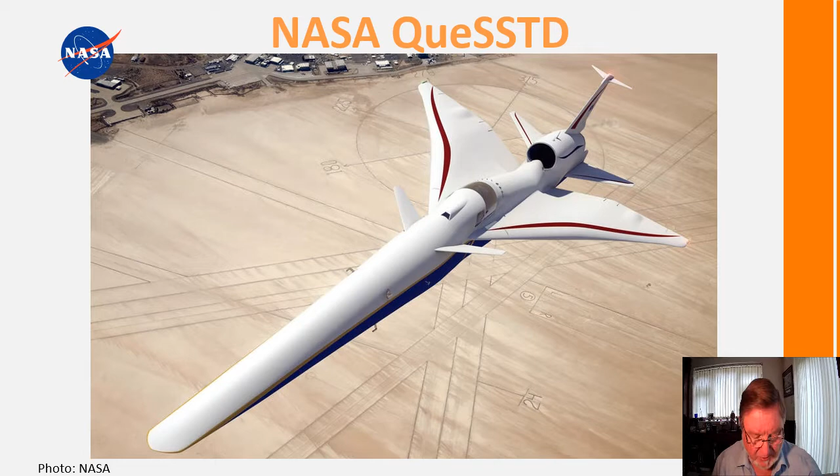There are a number of supersonic jet programs in progress. Once the flag is lifted to allow supersonic flight over land, especially in North America, the race will be on.

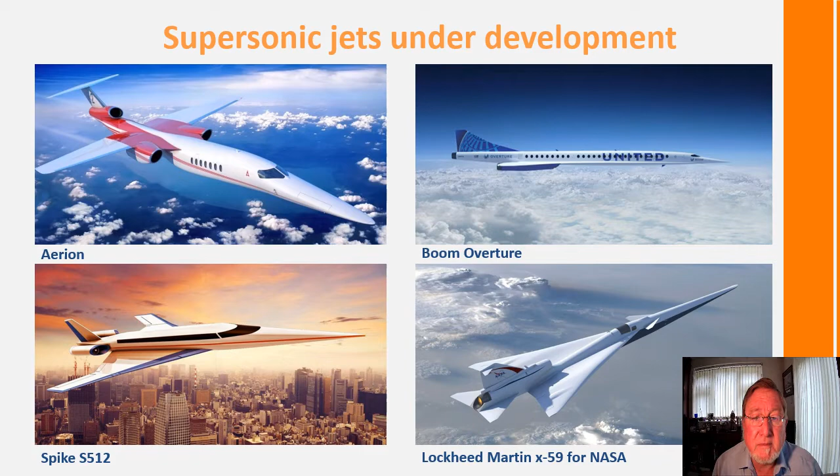Conditioning the air intake for supersonic jets is an important element of the engine design. Intake designs have changed relatively little since the original Concorde Olympus engines from Rolls-Royce 40 years ago.

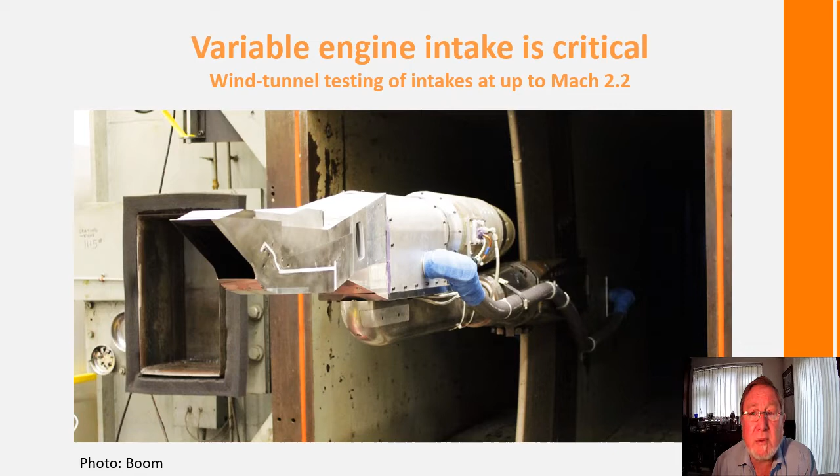Speaking of the engine challenge, Korovkin and his colleagues from CIAM in Russia showed us an alternative derivative engine with variable geometry. This engine study has a CFM56 engine at its core.

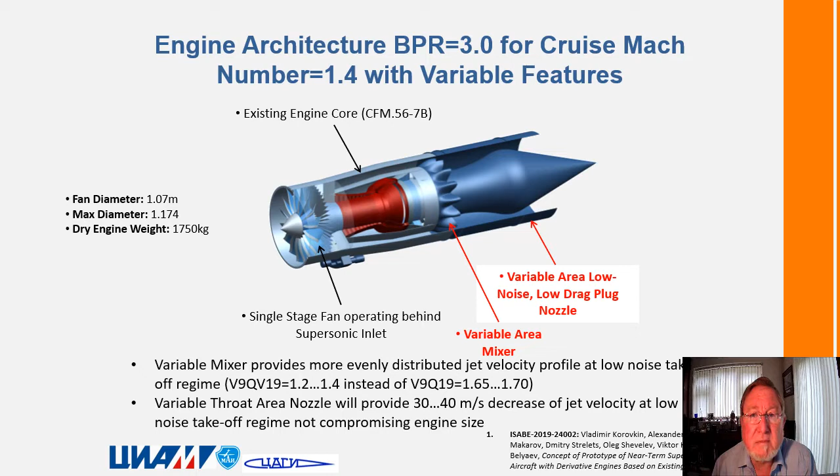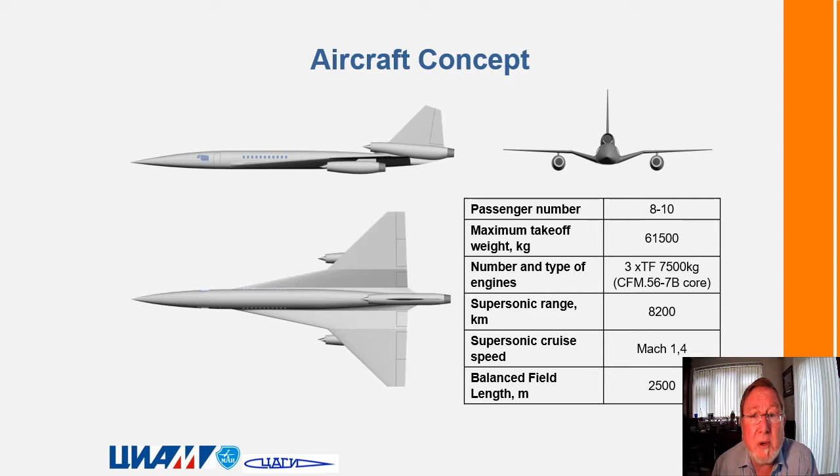They also showed a supersonic business aircraft concept, powered by their supersonic derivative engine. The very long nacelle helps absorb engine noise, while the variable mixer reduces takeoff noise. It lacks the very long profile shape of the NASA concept, so it's unlikely to achieve the sub 0.5 PSF boom at ground level that is required.

America's latest supersonic military jet is the F-35 Lightning. It is powered by a Pratt & Whitney F135 engine, a derivative of the F119. This was described by Thomas Prete of Pratt & Whitney. The alternative F136 engine from GE and Rolls-Royce was unfortunately shelved.

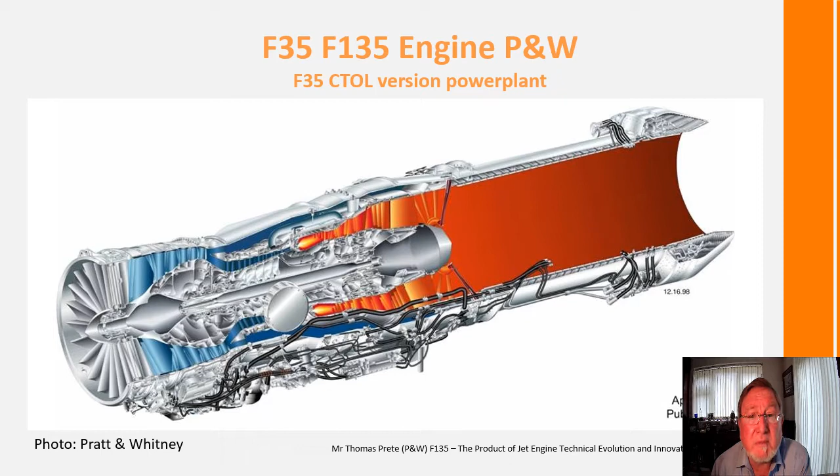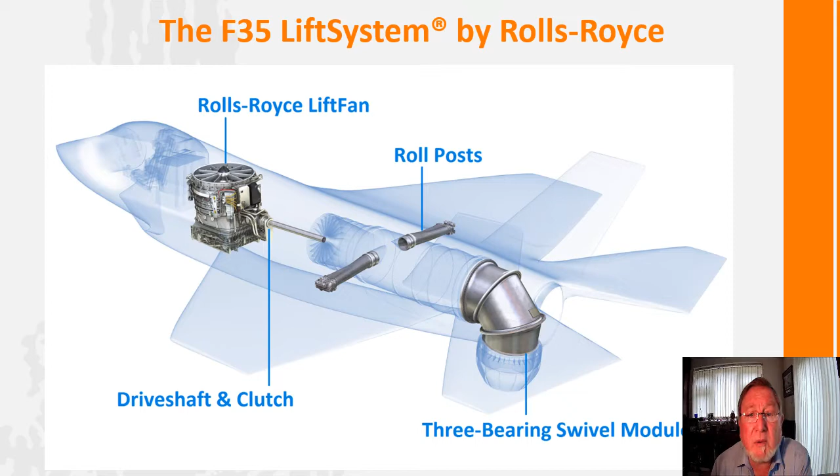Rolls-Royce does, however, produce the vertical lift system for the F-35B, the vertical takeoff version of the F-35 Lightning. This consists of a shaft-driven lift fan, dual fan, counter-rotating, driven by a shaft off the main engine through a carbon clutch and gearbox. At the back end is a 3-bearing swivel nozzle, which can transition from horizontal to vertical flight in just 3 seconds.

At speeds significantly beyond Mach 5, we're into the hypersonic regime, which brings its own propulsion challenges. Kevin Bowcutt of Boeing gave an excellent introduction to hypersonic flight, based on his long experience in the field. Here are some of his rules of thumb: conventional turbines will get you to around Mach 4.5, but have the advantage that they work from zero forward velocity, unlike ramjets and scramjets.

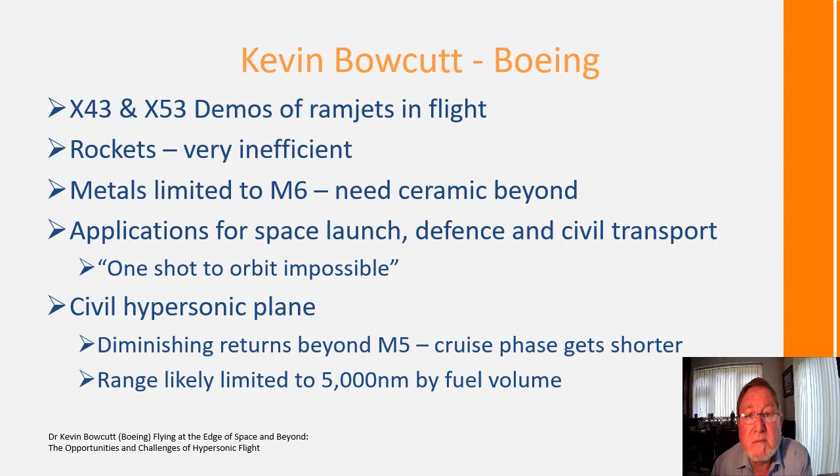Australia is a major centre for hypersonic propulsion research, and 5 universities all work together in developing these technologies. NASA has signed a new collaboration agreement to use the research institutes and the Woomera testing range to further develop hypersonic propulsion in partnership.

The Boeing X-51 Waverider is an unmanned research scramjet for hypersonic flight at Mach 5 and an altitude of 70,000 feet, that's 21,000 meters. It completed its first powered hypersonic flight on the 26th of May 2010. On the 1st of May 2013, it completed a flight of over 6 minutes and reached speeds of Mach 5 for 210 seconds. This is the fastest and longest duration powered hypersonic flight of this type.

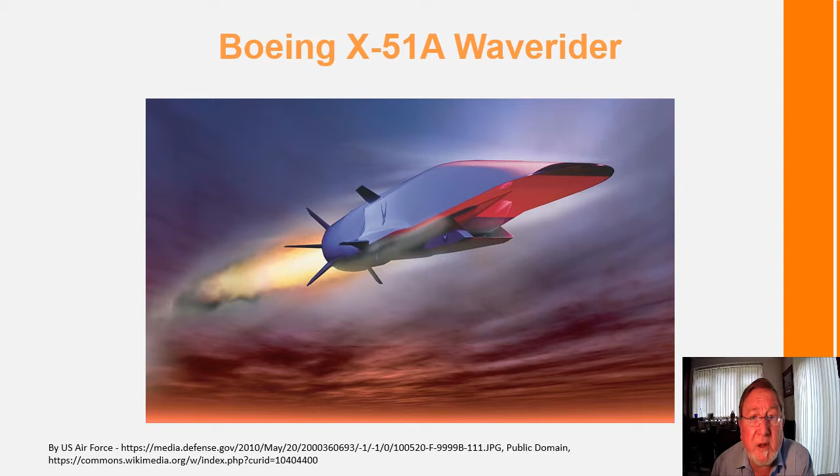Similar to its Boeing counterpart, the Chinese are already driving forward in hypersonic propulsion systems with their 0901.

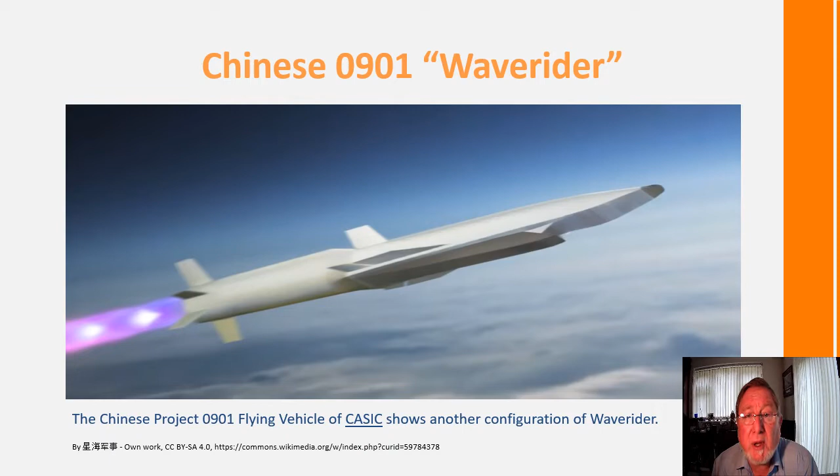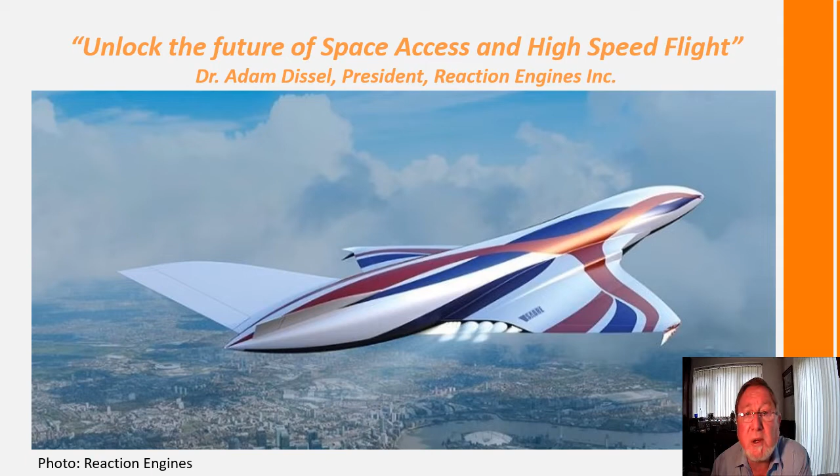We also heard from Adam Dissel, president of Reaction Engines Inc. The company Reaction Engines was the brainchild of Alan Bond. I worked with Alan on the original UK HOTOL spaceplane engines in 1985. HOTOL used liquid hydrogen fuel to cool the incoming air. Several miles of fine titanium tubes filled with liquid hydrogen was not such a great idea.

The latest SABRE concept from Reaction Engines introduces a liquid helium cycle as the inlet cooling medium. The helium boil-off in turn preheats the liquid hydrogen and drives the hydrogen fuel pump. The inlet air cooler has been demonstrated under a DARPA grant in the USA, running in the exhaust stream of a GE military engine, where it demonstrated the ability to drop the inlet air temperature by 250 degrees C.

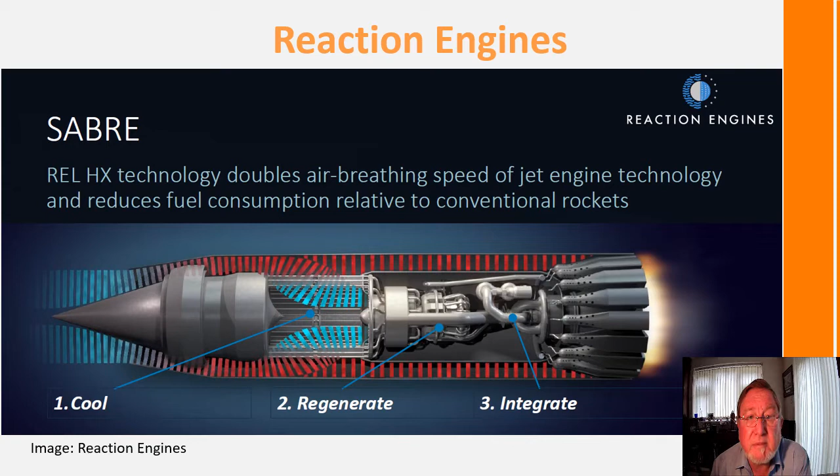The unique Sabre engine operates as a conventional turbine at low speed, less than Mach 4, and then switches to rocket mode at high speed, burning its liquid hydrogen in pure oxygen.

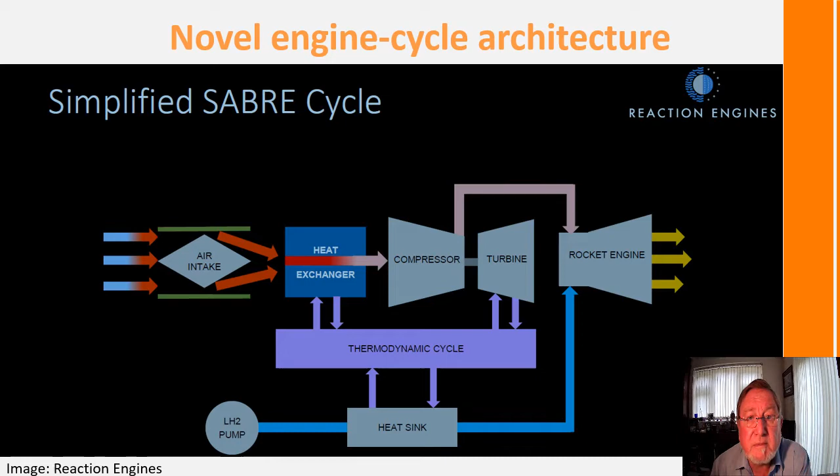Here's a photograph of the DARPA-funded pre-cooler test. You can see the pre-cooler on the right. It's over 1 meter in diameter. And on the left, through that panel in the wall, is the GE jet engine, which is providing the hot gas for the pre-cooler.

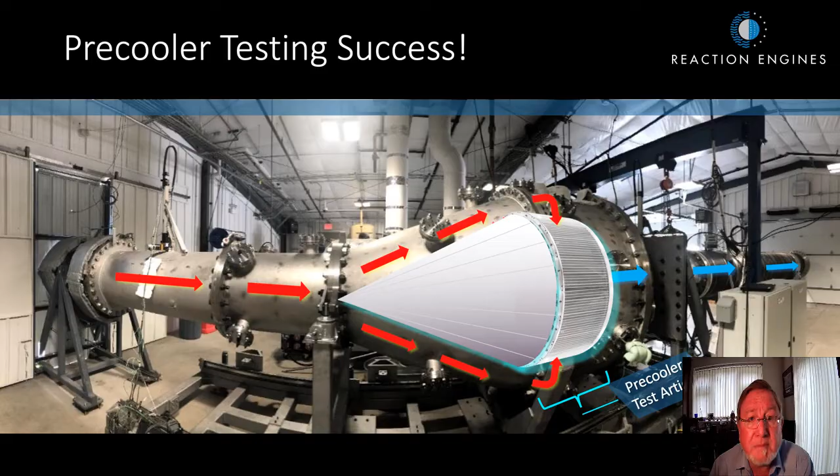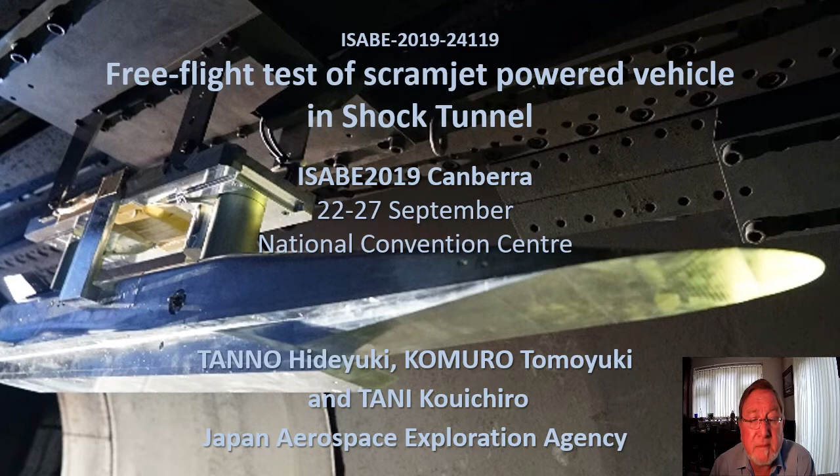When the electromagnets are deactivated, the model was dropped 400 milliseconds just before the test flow arrived, so it was in the center line of the test section. Then the engine ignites. Pressure and acceleration histories were recorded during free flight. Finally, the model was landed on the shock-absorbing system on the floor of the test section without any damage to either. Pretty neat.

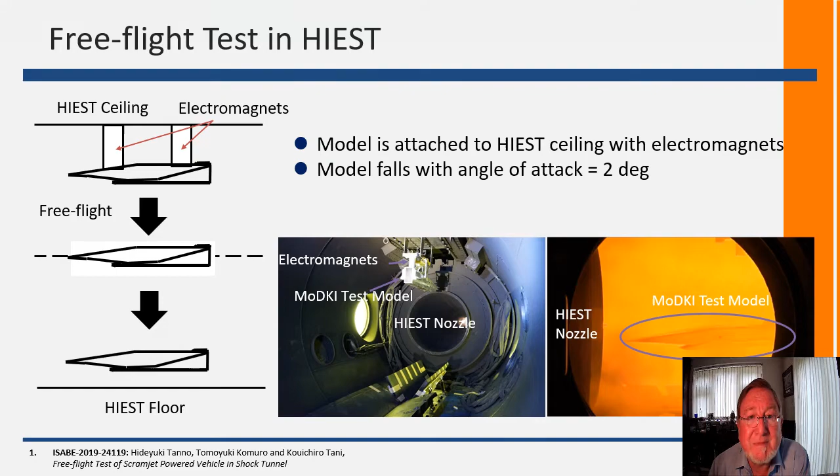Alex Ward and Mike Smart from the University of Queensland described some novel aerodynamic modelling of a hypersonic vehicle. I think you'll all agree that the results for the vehicle at Mach 8 are rather beautiful.

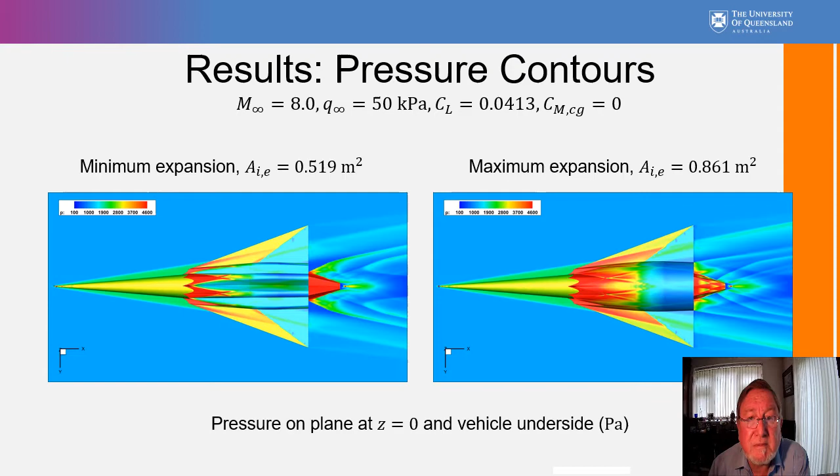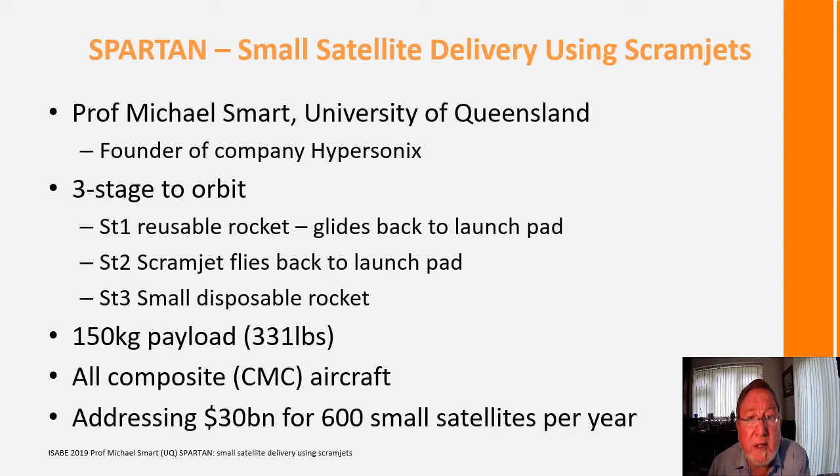His novel concept for a three-stage-to-orbit system is based on a reusable rocket, a scramjet, and a disposable final stage rocket. The reusability of the first two stages and the ability to navigate back to the point of takeoff gives it an advantage over other competing systems. He's established a company, Hypersonix, to develop the system further.

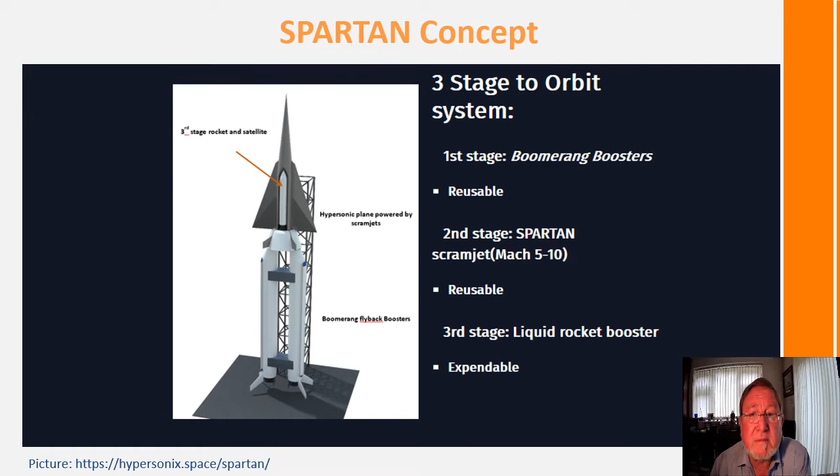One of the major factors driving commercial air travel is concern for the environment. The industry has committed to impressive targets to reduce CO2, NOx, and noise emissions by 2050. The ultimate plan being to arrive at net zero carbon air travel.

We had a fascinating talk from Captain Alex Passerini, the chief test pilot at Qantas. Although ISABE is an engine society, we like to get views and input from all parts of the industry, especially the end users.

Perversely, if we did the same route as the flying boats with modern aircraft designed for short range with highly efficient engines, we'd probably do less damage to the environment than a single long journey, when most of the fuel carried by the aircraft is carrying fuel rather than carrying people.

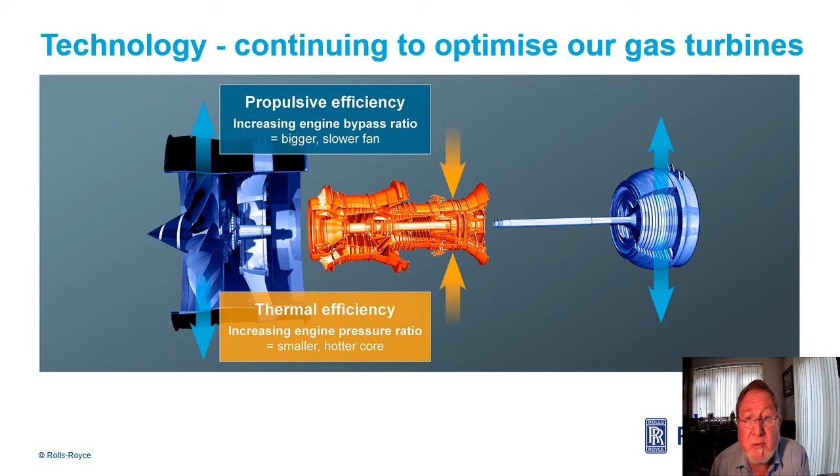Rolls-Royce's UltraFan pushes propulsion efficiency even further and combines their three-shaft novel engine with a new low-pressure, low-speed fan. The fan is separated from its driving IP turbine by a high power density power gearbox, allowing the turbine to maintain a high speed and high efficiency.

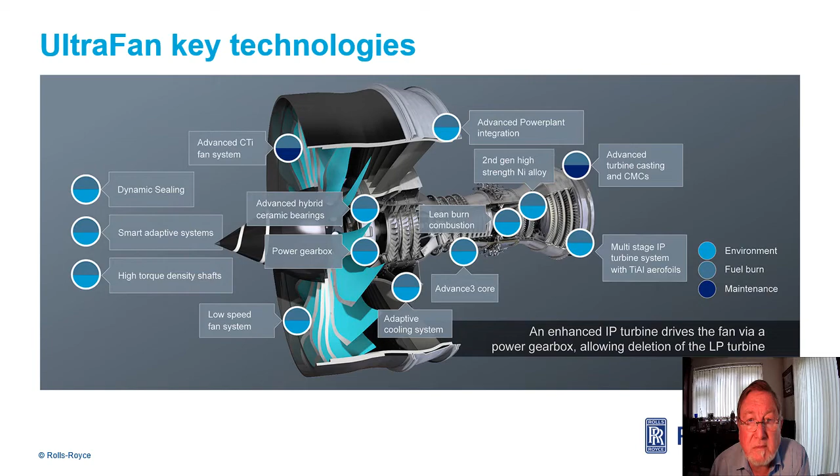The gearbox for the UltraFan is a novel design generated by Rolls-Royce with its partner Liebherr. The target efficiency for the gearbox is over 99.5%. But even at this efficiency, the remaining loss will manifest itself as heat, and 375 kilowatts has to be dissipated somewhere through the oil system.

Testing has successfully demonstrated this gearbox at a novel test facility outside Berlin, both in level flight and severe inclination conditions.

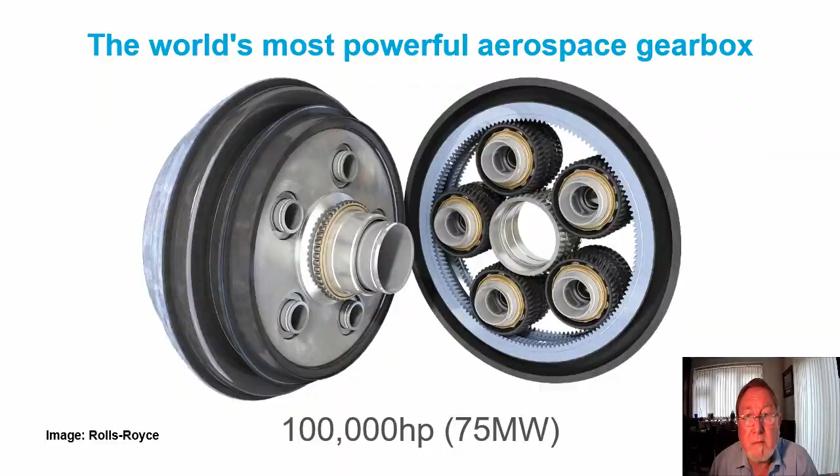One of the other concerns for global warming is contrails from aircraft. Sébastien Cantin and colleagues from the University of Quebec showed their approach to modelling contrails.

The approach combines CFD for plume tracking with embedded particle tracking. A microphysics module and STAR-CCM+ code populates the model with ice particle properties and particularly the size distribution of the ice particles.

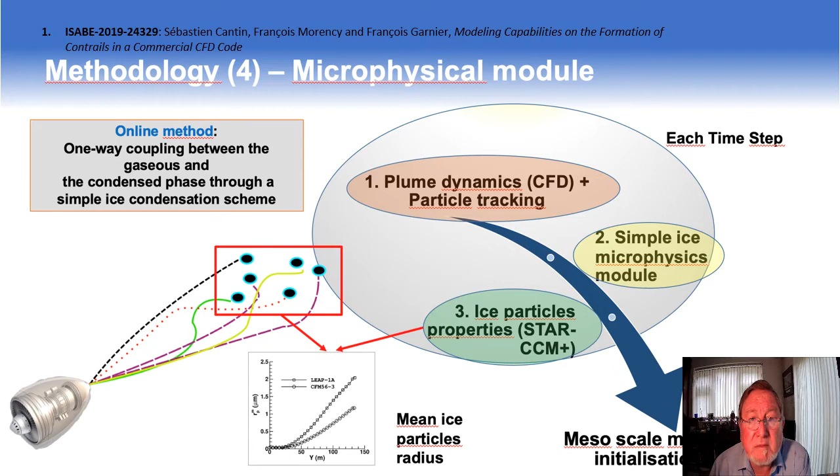Noise is another aircraft impact to be minimised. NASA has set a long-term noise goal of 42 to 52 dB cumulative below stage 4. Van Zante from NASA described their latest thoughts on airframe engine integration on various concept aircraft.

In these configurations, the modelling must take account of effects of inlet distortion, jet surface interaction, reflections of jet noise, and rearward fan noise from other surfaces. In both these cases, the noise benefits were shown not to be as high as originally expected.

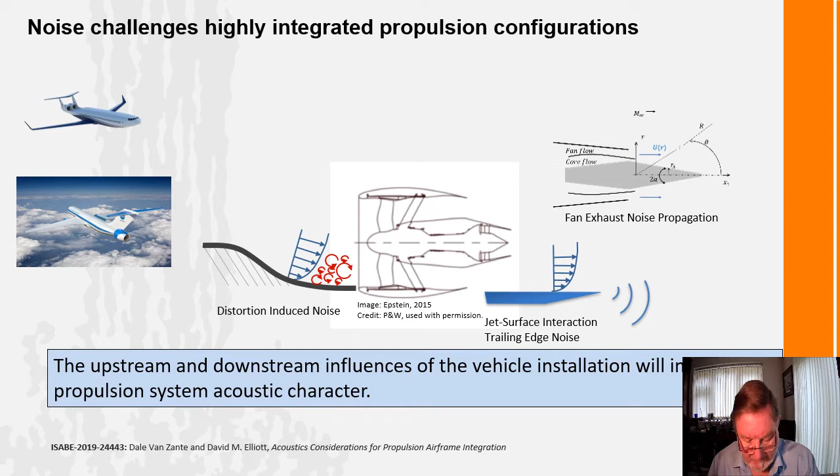Increasing thought is being given to future fuels to enable zero carbon. Biojet fuels are not generally carbon neutral and today are only permitted in a maximum 50% blend. Synthetic aviation fuel can be carbon neutral but not zero carbon. It's made from captured CO2 and green hydrogen. The CO2 released into the upper atmosphere has a higher warming effect than that originally captured at ground level.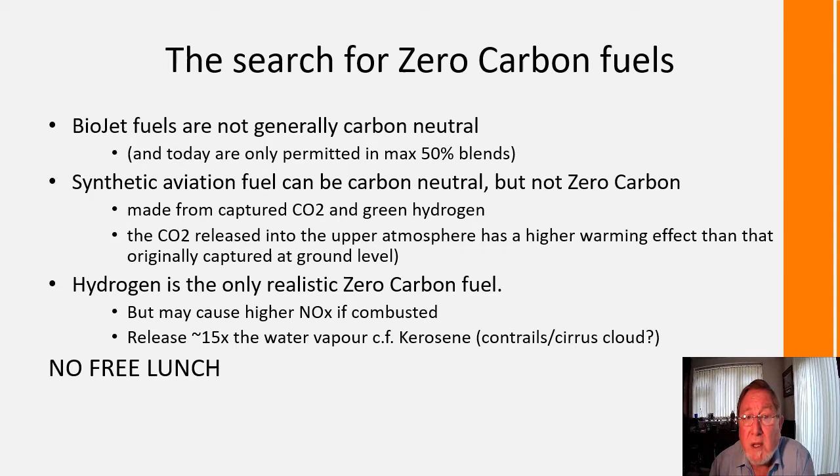Hydrogen is the only real zero carbon fuel for the future, but may cause higher NOx if combusted. It may also release of order of 15 times the water vapour compared to burning kerosene. This may lead to increased concerns over contrails and cirrus cloud. So basically, there's no free lunch.

In this table, I compare kerosene Jet A with other fuels for a return flight from London to New York. In terms of weight of fuel, hydrogen has an advantage over kerosene. However, it must be stored in heavy cryogenic fuel tanks. When converted to electricity in a fuel cell, hydrogen looks even better, but a fuel cell is much heavier than a gas turbine. Hydrogen loses out in volumetric efficiency, requiring larger tanks and bigger aircraft for the same range.

Just for fun, I've included uranium. Nuclear aircraft look quite promising. Just 18 grams of fuel for a return journey to New York. Not bad, really.

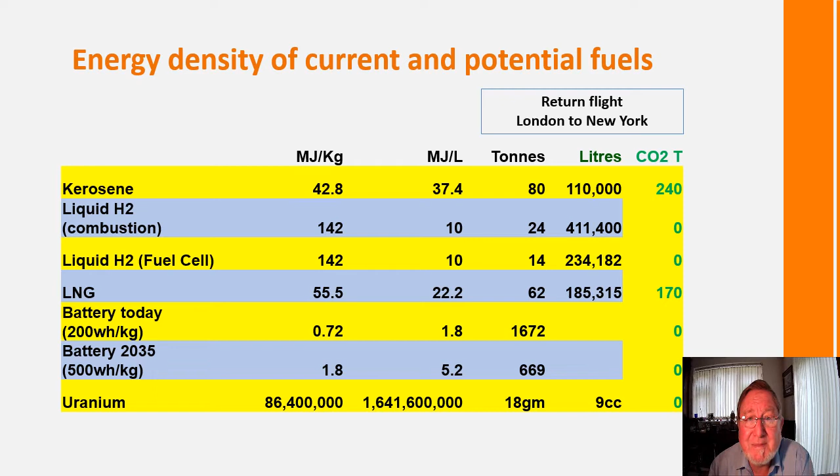This nice cartoon from NASA epitomizes the challenge for all electric large aircraft. It possibly can be done, but leaving no room for passengers or payload.

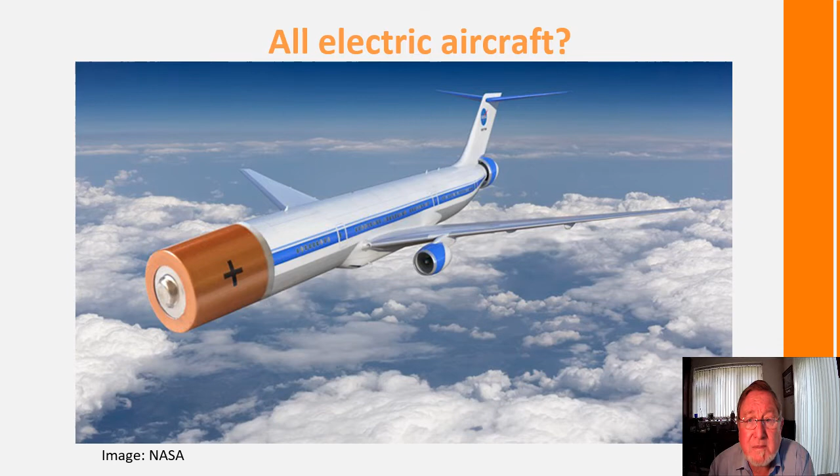So let's look further at electric and hybrid propulsion. If all electric propulsion does take off, we may need to change the name of our society, since engines will no longer be air-breathing.

For this electrical journey to be successful, all aspects of the electrical system require a factor of 2, ideally a factor of 10 increase in power or energy density. The most challenging of these is probably the battery technology. Physics and chemistry are likely to set ultimate limits of around 1 kilowatt-hour per kilogram, which is only 4 times better than the best today.

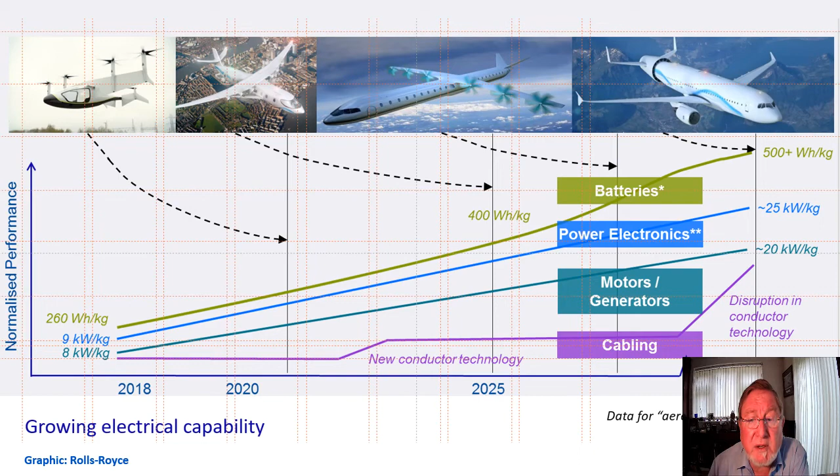Every part of the system must be minimized in weight. That includes the cabling, and novel systems may allow significant and disruptive improvements in this.

Ralph Jansen from NASA Glenn described their propulsive fuselage concept. This is an engine maker's dream. So many propulsion units on one aircraft. Wow.

This hybrid electric aircraft has conventional engines for primary thrust and electrical power generation. An array of electric fans around the rear of the fuselage ingest and re-energize this boundary layer. The large number of fans ensures maximum boundary layer coverage.

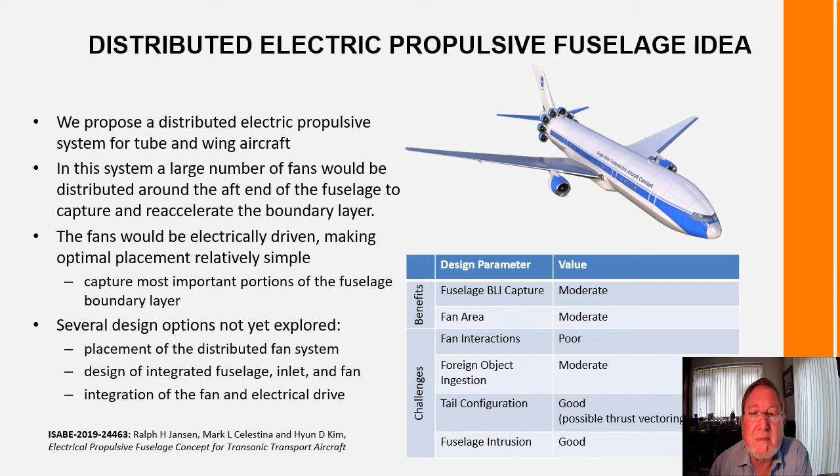Further work on the propulsive fuselage was described by Troeltsch and his colleagues from Bauhaus, done under the EC Centerline Consortium. You can see the large number of consortium members at the bottom of the screen. A series of trade studies was reported for rear fan boundary layer ingestion configuration, and the optimum figure of merit led to a 5% total cruise drag reduction. This is similar to the drag reduction seen in other boundary layer ingestion studies and is well worth having.

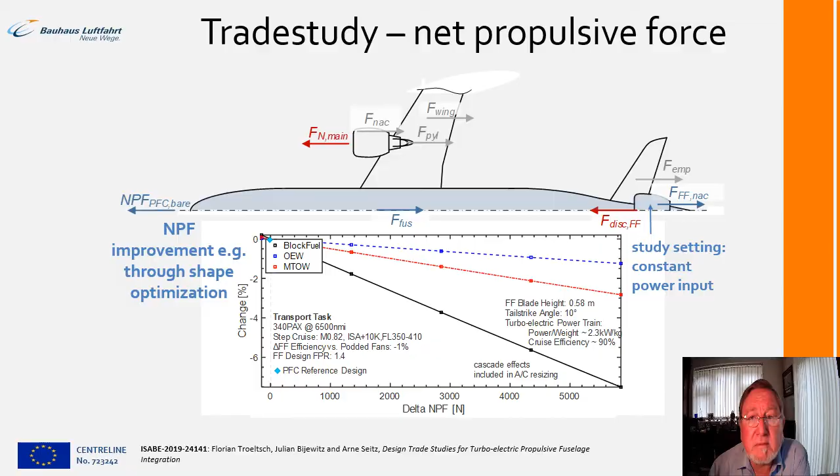Another study from the Centerline team, led this time by Sebastian Samuelsson, looked at optimizing the main turbofan for this hybrid solution. Compared to a conventional geared turbofan engine for the same size aircraft, less thrust is needed from the main engines, with some provided by the rear fan. However, higher mechanical power offtake has to be extracted to drive the generators, and these generators themselves will be very large in this configuration.

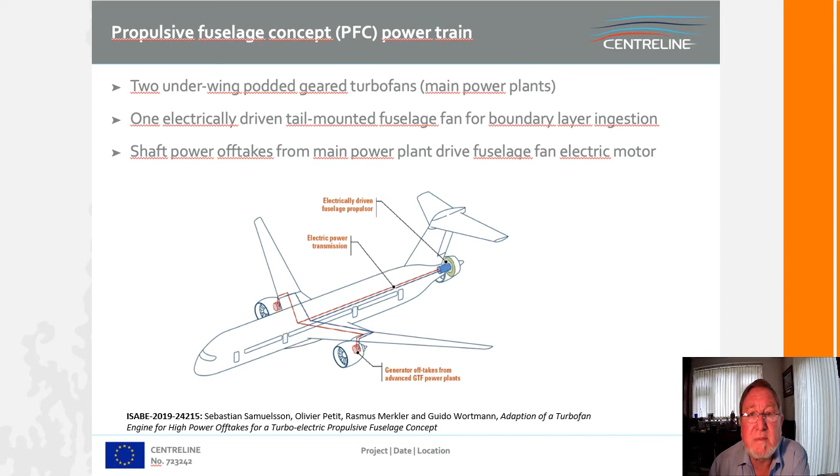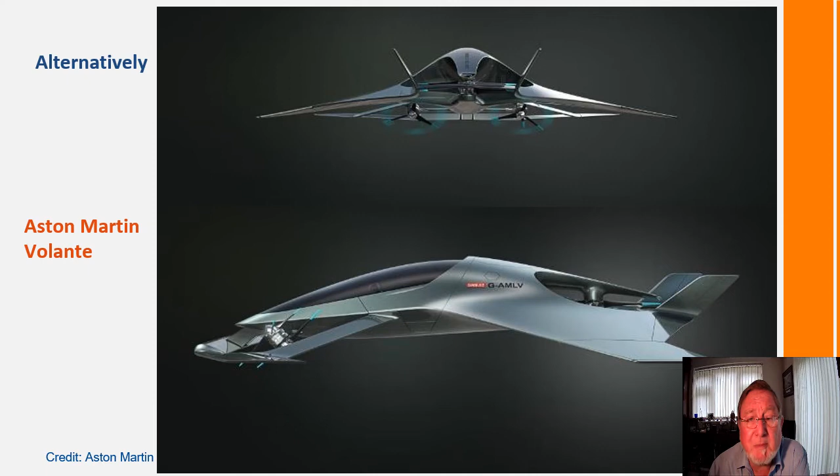Even luxury car maker Aston Martin is getting in on the act with its Volante concept, powered by Rolls-Royce electrical systems. Do you think this could be in the next James Bond movie? Let's wait and see.

ISABE 2019 seems a long time ago now, so I thought I would finish with a teaser for our 2022 conference. We will publish this month a special edition of the Royal Aeronautical Society Journal. Before we took the decision to postpone our 2021 conference until 2022, we'd already received a lot of abstracts and papers. We selected 11 of these, which will be published this month in the journal.

From Jeonbuk University in Korea, Choi and his colleagues demonstrate the effect of using a lobe mixer on exhaust infrared signature at various bypass ratios. At bypass ratios over 1, it creates a significant reduction compared to a plain conical nozzle. This may be increasingly important as commercial aircraft come under threat of rocket attack from terrorists.

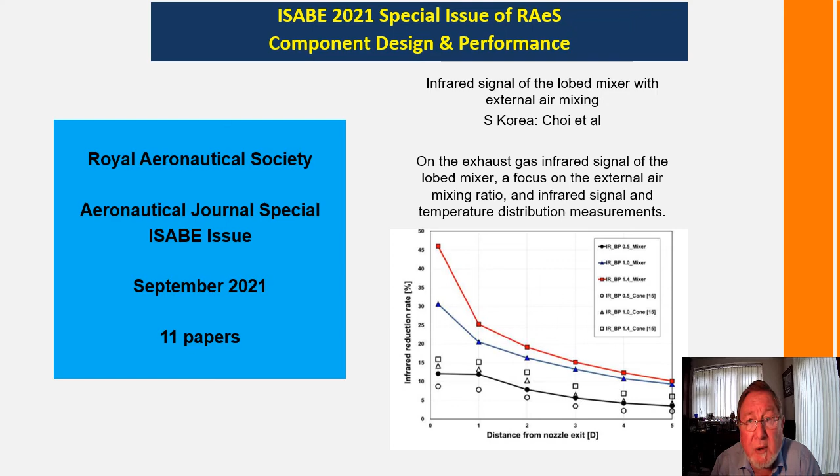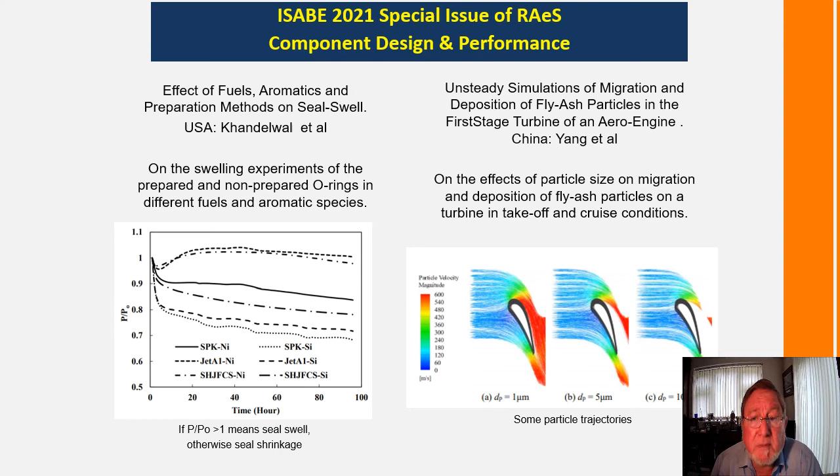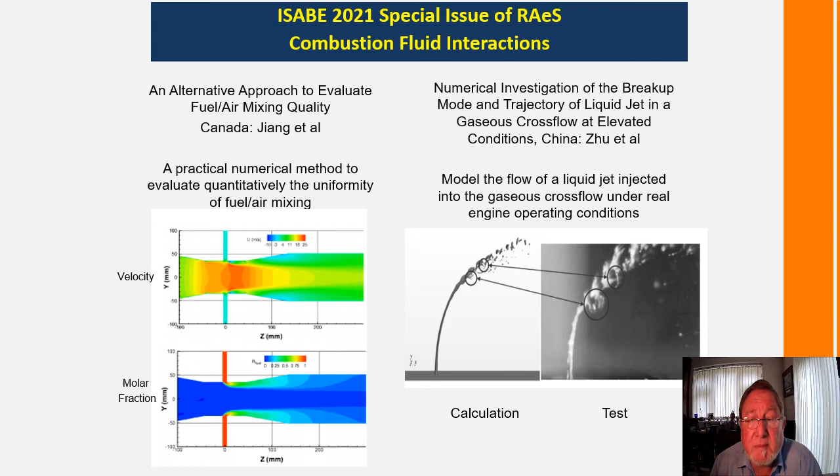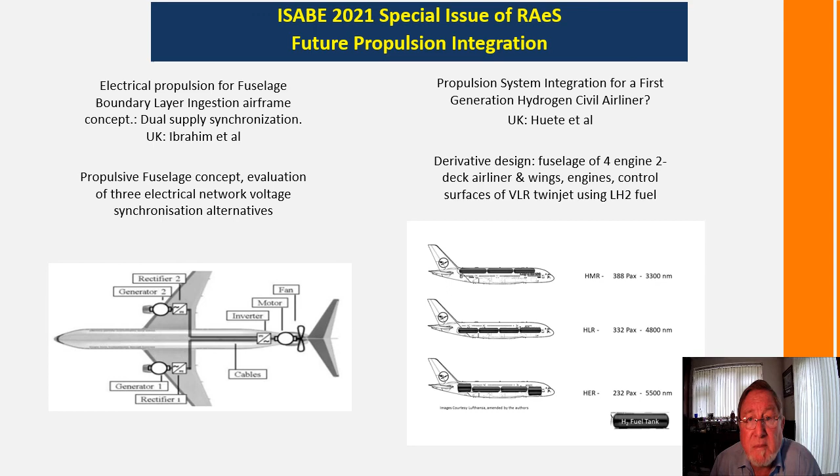On the right, in another paper from Cranfield, Huete and colleagues did some fascinating work modifying an A380 to create a medium-range hydrogen-powered twin-jet. They made full use of the vast fuselage of the A380 for hydrogen fuel tanks and studied 3 different configurations. Because of the lower passenger load and lower fuel weight for hydrogen, they were able to use A350 wings with the A380 body. Could this be the future for hydrogen flight? Let's wait and see.